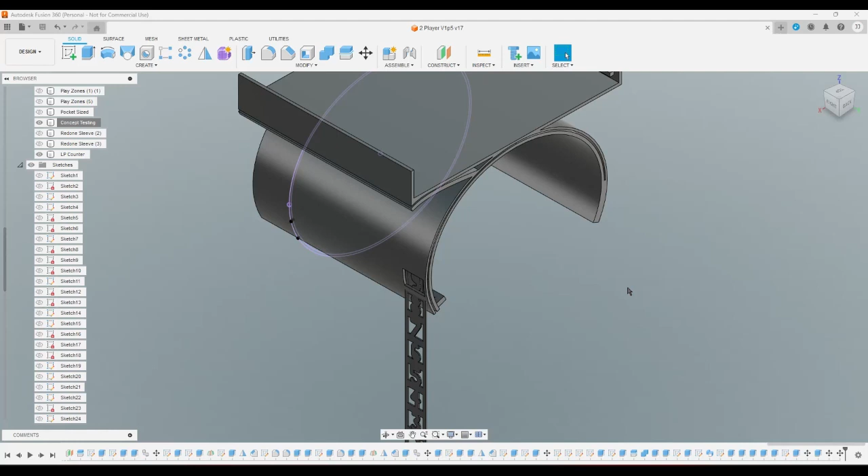Okay, so this was alright. Everything else needs a bit of work. So back into the original, the sketch for the sleeve. I'm gonna need to... what am I gonna need to do? I'm gonna need to redesign essentially the sleeve part of the sleeve, and I'm gonna also need to probably change this. Let me see how the other sleeve is. Okay, so it does go out just as far, but it has that thing in it.

So I'm gonna go back to the sketch here and basically redesign it. Should I redesign the whole thing from scratch? I should probably redesign the whole thing from scratch. Because if I'm gonna redesign it, right, I might as well. So here's the idea that I have. Okay. So take all this and just delete it. Right? I'm gonna finish the sketch real quick because a bunch of stuff is based off of it that I'm gonna just get rid of.

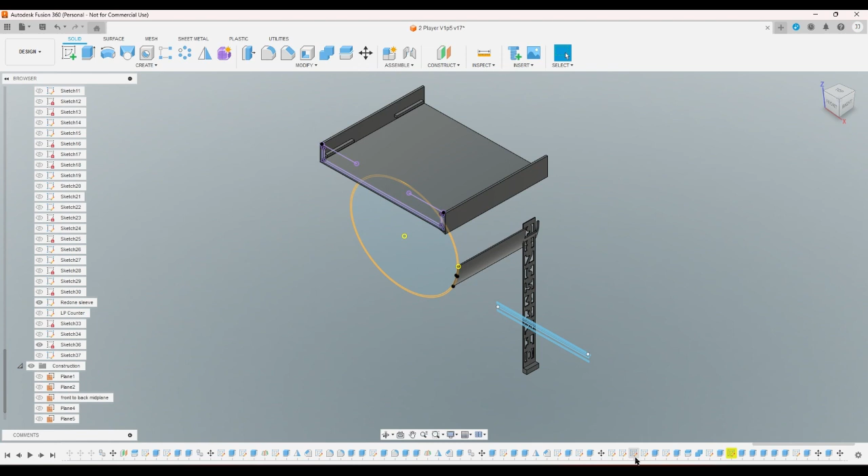Oh crap, hang on. Let me make sure that the... where is that sketch? Oh, it's way the heck over here, okay. And that got rid of all that stuff. Now I'm gonna go back into here. I'm gonna make my little ellipse here.

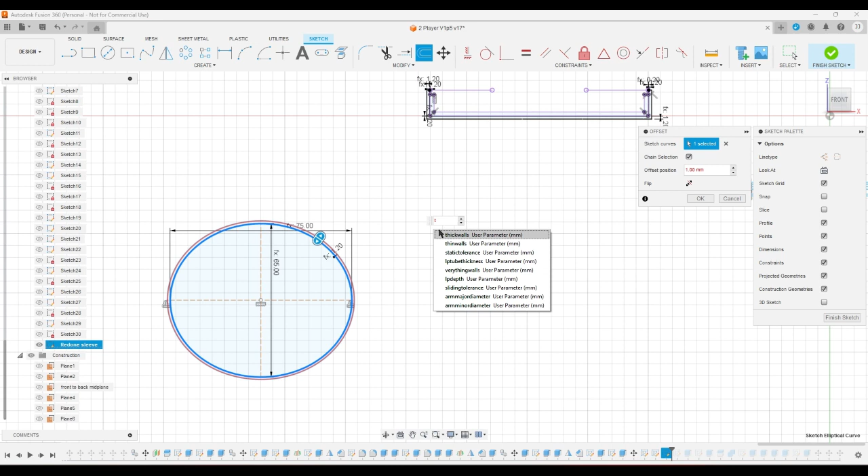No, no, no. That's what I meant to do. What the hell? No. Okay. And then offset this by thin walls. Okay. And I'm gonna kind of ignore that for a minute. Let's see. Since I'm redoing this, I might as well remember that I need to put the strap through it, right? So then, if I offset this by thin walls, plus I think it was 2, right? Two ought to do it.

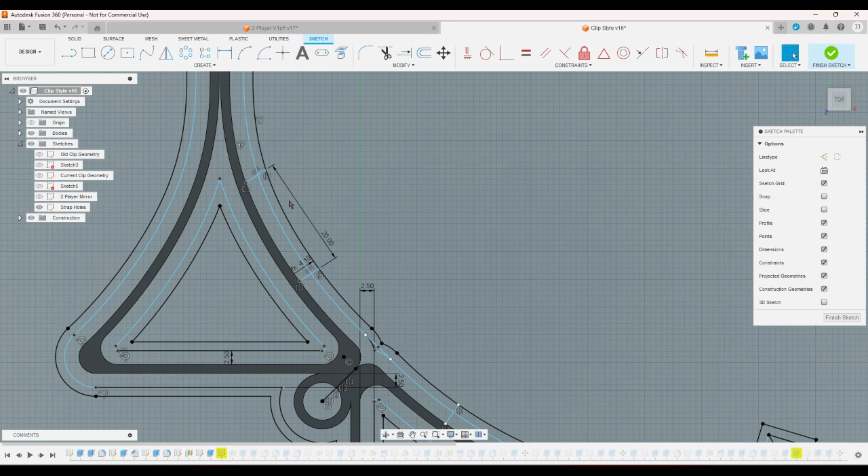Let me open my... measure that. Wall legs, wall fence, wall tube, wall geometry. Old wall geometry, extra deck, divider sketch, dividers, current wall geometry. I need to see. Okay. Ah, the strap holes. Okay. And the strap holes are in a weird place. That says 4.1. .6. Okay, so 2 will work. Don't save changes. Okay, 2 will work.

And then offset this by thin walls +2 plus very thin walls, except it's spelled very thing walls. Okay, so what that'll do is I've got the strap going through there, right? And actually, oh, I've got it, okay. Not yet, okay. The strap's gonna come out. I'm gonna plan out where my strap is gonna come out. The reason why I'm going to plan out where my strap is...

Oh, I have a cool idea. Because this is an ellipse, I can set these to be equal to each other. And so if I move this one, the other one's got to move too. Ha! That's cool. That's funny. Okay. If they come out about here, right? I can now trim this. That is annoying. That didn't work. Okay. So if I trim this from there, now it's okay, whatever.

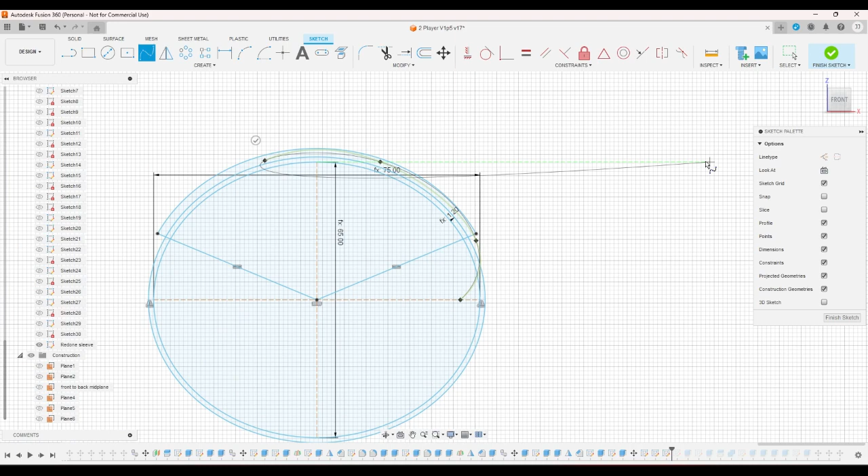But because the straps are coming out through there, right? Watch, if I drew a spline real quick to show it, right? It would basically go through a hole in here. Like that. Right? That's what it would do. Oops. I'm trying to visualize this. So because it's coming out through there, I need to put a line going essentially down like that. Okay.

And I need to put another line here and another line here, and make this one equal to this one, and put it about there-ish. Okay. Oh. This has to go all the way. Okay, yeah. Okay. So now I can offset, hopefully this one. Yep. By like 0.8. Right? I might as well just make that whatever.

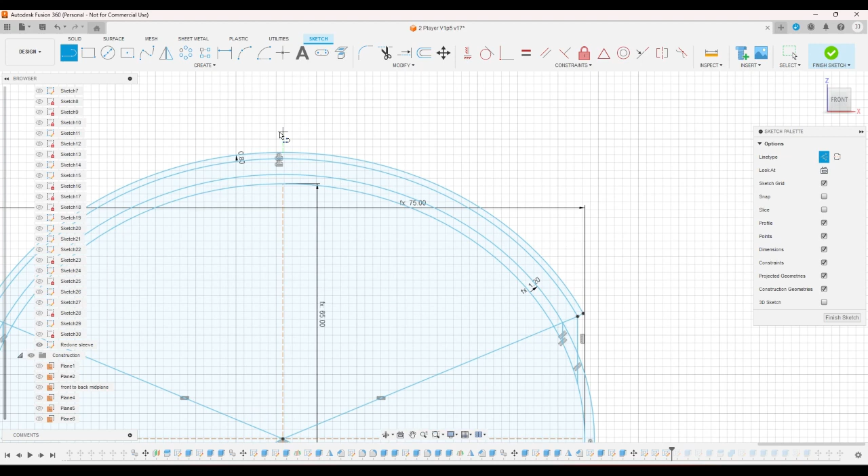And now this is where I have to put the... what's it called? The life point counter tubes. Right? And so these are gonna go, let me put construction lines here. These are gonna go this far. From there, then the first one's gonna go all the way this way. And then if that's that, then this one has to go about to here. Right? Yeah. And then I can probably go ahead and do this.

And then I can offset this by the... that one and that one are not... okay. The issue is this is getting quite thick. Ooh. The issue is this is getting quite thick, right?

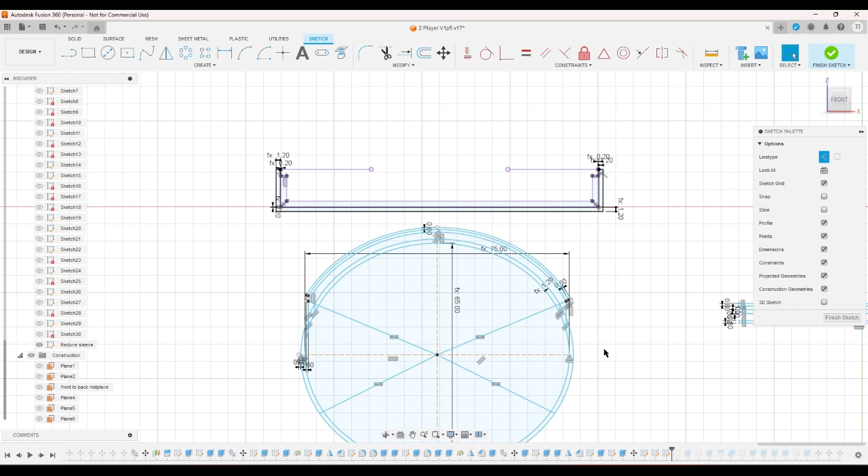So, but anyways, I could put this on this, right? And that's where it snapped. And then I gotta remember to, and then I'd offset this. Hang on. Okay. And then I'd offset this by the very thin walls. It'd be to there, and to there.

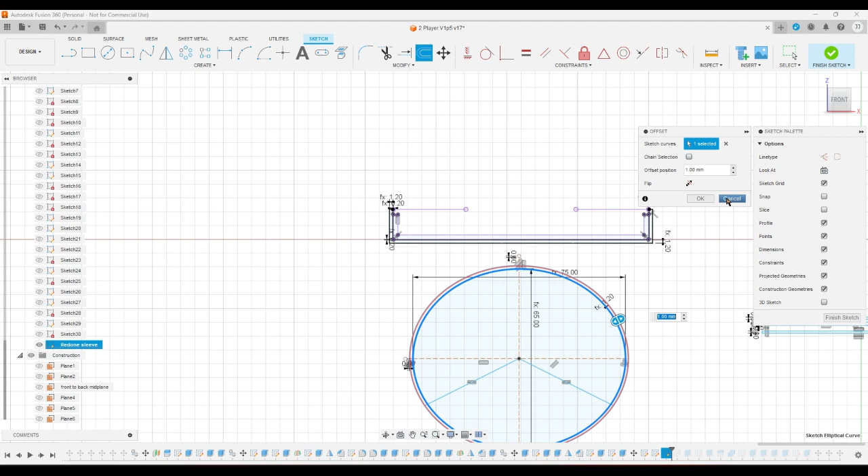I don't like where this is. So what I'm going to do is I'm going to go ahead and just delete everything outside of this. Okay. And I'm going to do the life point counters first. And I'm going to go ahead and put the strap holes through the inside of this. Okay, so, whoops. Go ahead and delete all of this stuff.

Alright. And then offset this by thin walls plus the life point tube thickness. And then put a line going out to the first one. Let's see, so that would be, yeah, and then this would be the very thin walls. Oops. Very thin walls. And then put offset.

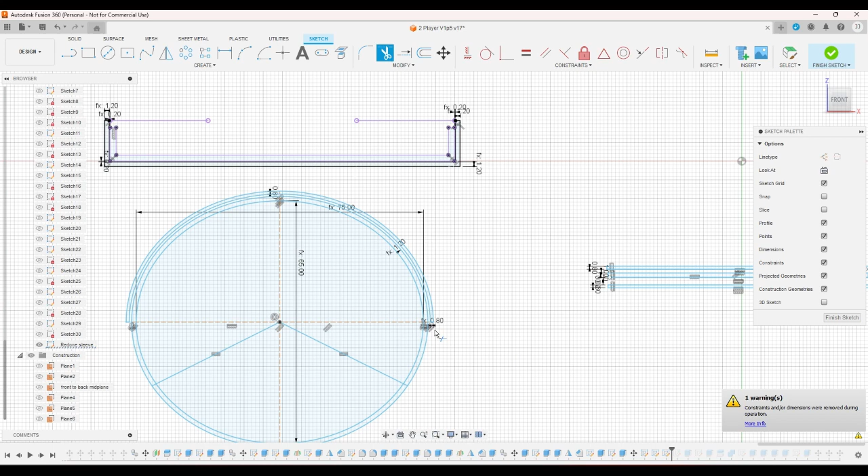I don't think they necessarily need to be, okay. Where do I want the life points to show up? I want them kind of visible. I want them more or less, I want them to come a little bit further down than this. So let me finish this real quick. I mean, not finish, but like click on finish. And then what size? 6.5. Okay. Okay. So, okay. This needs to be about 6.5, maybe 7.

And it needs to go here. And it needs to be here. It needs to be here. And this one needs to be also on it. Okay. This right here, that is as far as that needs to go. Can I put a tangent line on it? Can I put a tangent line at an angle on it? Yes, I can. Okay. Good.

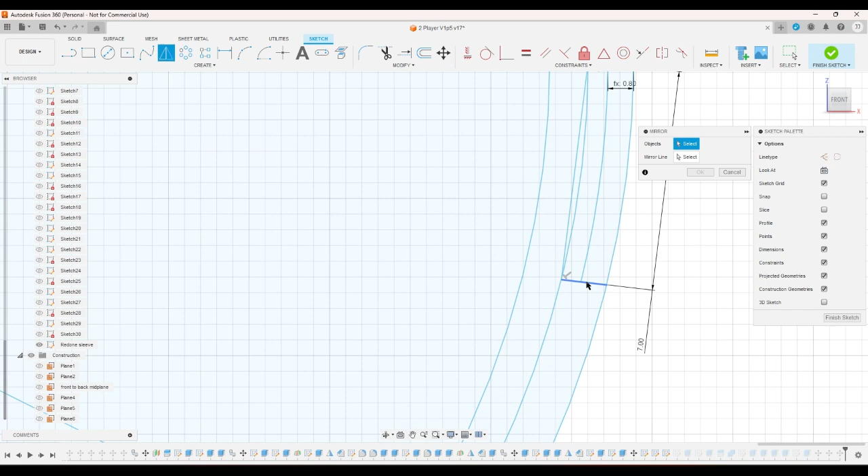Just as long as this is coming around both sides. It opens up here. Then one of them closes like here. And the other one has to curve around it. Oh wait, hang on. I'll just make this... It won't be perfect, but like I can make this perpendicular to this as close. Right? And then if I just mirror this across here, mirror this across here, then I can just extend that one and then trim this and this, right?

And this. But for some reason, I didn't mean to trim this one. Why did that get cut away? I guess I just accidentally cut it off. Okay. Oh, it's because I meant to cut this one and I accidentally clicked on the wrong one. Okay. So now I've got that. And that's not going to work because the two slips will collide with one another. So this one will go like, I don't know, here-ish. And then the other one will have to go above it. So, or maybe it'll go under it. No, it'll go above it.

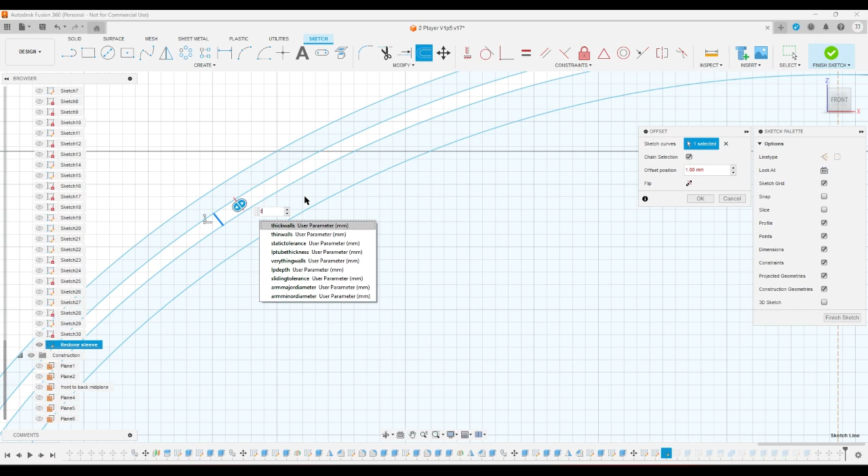If I go and offset this one by thin walls, can I... Ooh! So can I also... Okay, that puts those exactly where they need to be. So that's what I should have done here. Oh well. And then this. Alright. So now I'll go around here. I believe... Oh, no, okay. Okay, shapes of things didn't change. And if I move this around... Okay.

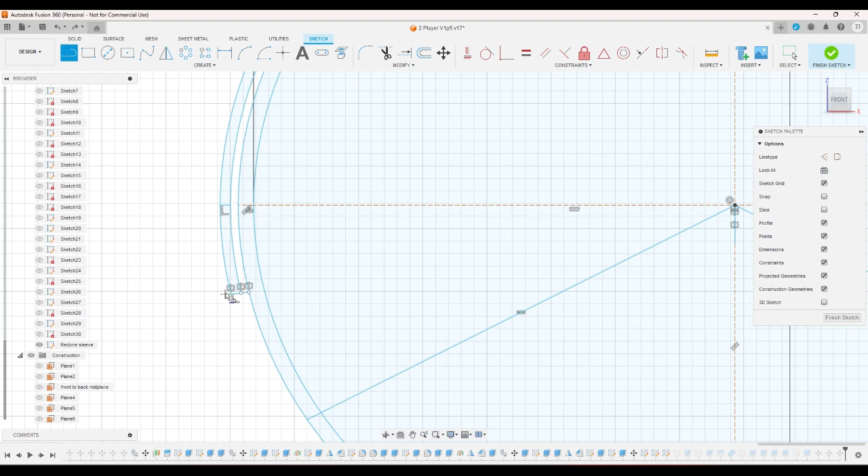Next is... Wait a minute. Is that... What in the world? This is not mirrored properly. Why is it not mirrored properly? Okay, I'm just gonna put that there. Then if I put that... Okay, that... Okay, good. So trim this one. And this one.

So if this one goes up, and we're to stop about here, how much space is in between? How much? Okay. How long is this in total, right? That's what I need to know. It's 95. Can I reduce that slightly?

Not really. Okay, I'm just stuck with 95 then. Okay. So since it's 95, I need to go to... Okay. If I take a squared plus b squared, square root of that. No, a squared plus b squared over 2, then the square root of that. And that gives me the whole circumference, and I need like a quarter of that, right? So then it's half of 65 and half of 75. So like 65 divided by 2 is 32 and a half. 75 divided by 2 is 37 and a half.

Okay, so square root that. Nope. Square that again. Divide that by 2. Now square root it. It's 26. That doesn't make sense. So if I do the 95, right? That can easily wrap onto that. So I really only need it to go like, because if it starts here, right, it can wrap around to thereabouts, right?

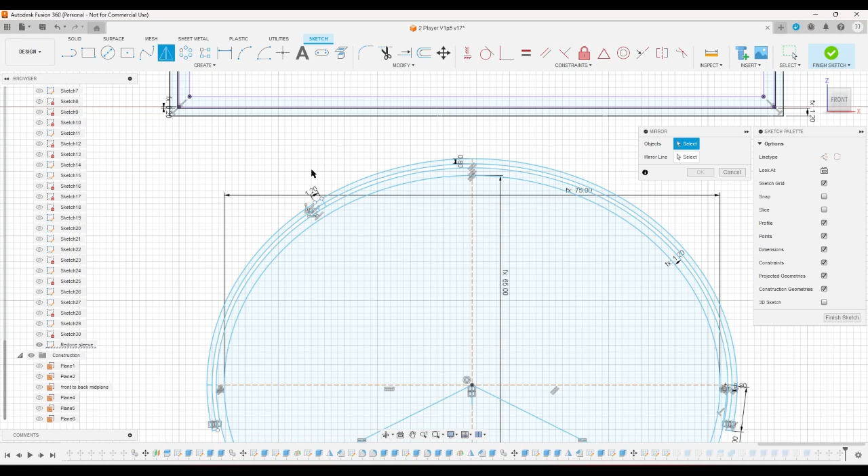Oops, wrong number. 1.2. I'll just call it there, and then okay. Now this one has to wrap around to approximately the same place. So if I mirror this across this line, and I just extend them, right?

And then this one kind of has to go from here to about something. There, okay. About there, okay. And then from here, that's got to be the life point tube thickness. All right.

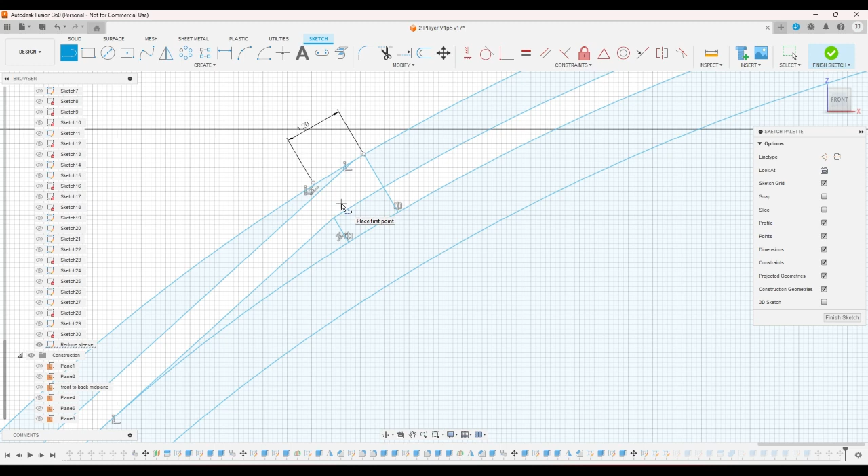And extend this all the way. Now if I trim it, if I extend this, and I trim this, that was not on purpose. If I extend this back to there, I can trim here. Alright.

And then, what is this? This is going to be very small, isn't it? .235. Okay. So I'm going to make that just 0.8. No. I've got it. Okay. All I got to do is take this point, go back to where I was defining. Okay. Let me define this by an angle. Ooh, okay. I know what I need to do.

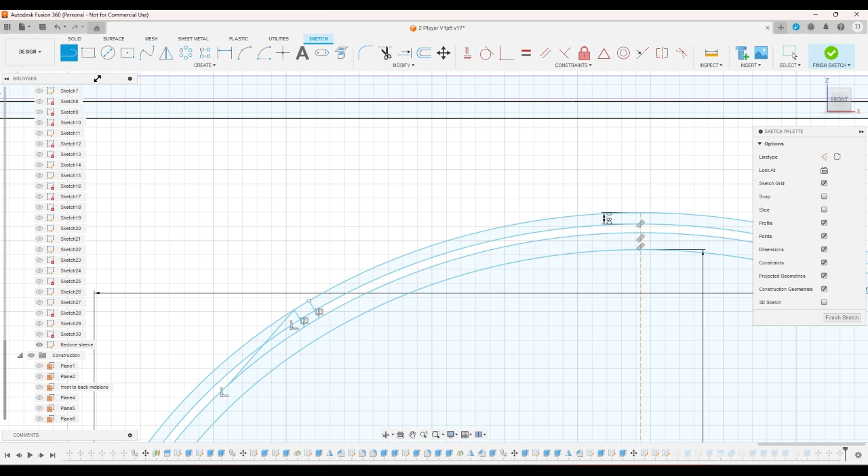So now if I go from here and that'll be my 1.2 thickness. And I extend this as far as it needs to go. Right? So now I can trim what needs to be trimmed away. Okay, so now this one has a path to wrap over to the other one. There we go. That's what I needed.

So now I need this to be that, and then I need this to also be that, and then I need to make an ellipse that goes from here to here to here, and I should be able to trim off what I don't need. Yeah, okay. Okay. So now this can go up to there. And if I imagine these, I can trim this.

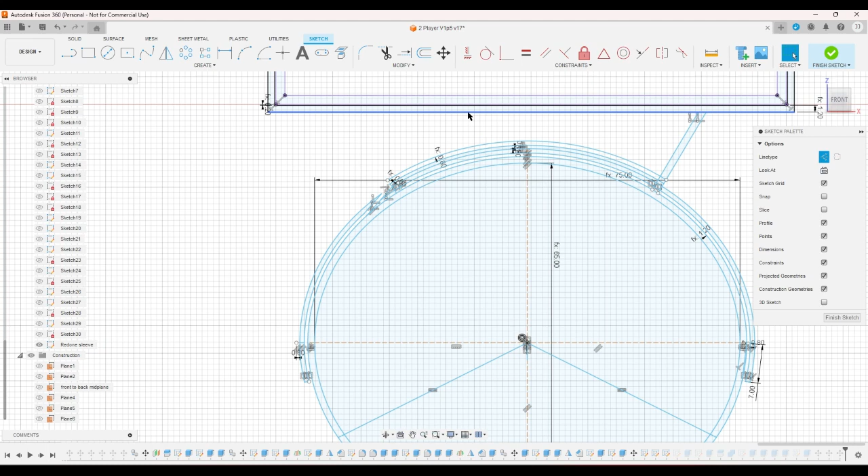And then I can offset. I can select just this and offset it by very thin walls. And then I can connect this to this one with an arc. Where is it going to snap? Where is it going to snap? And if I try to move it, yeah, that's moving all the stuff that I don't want it to move. Okay.

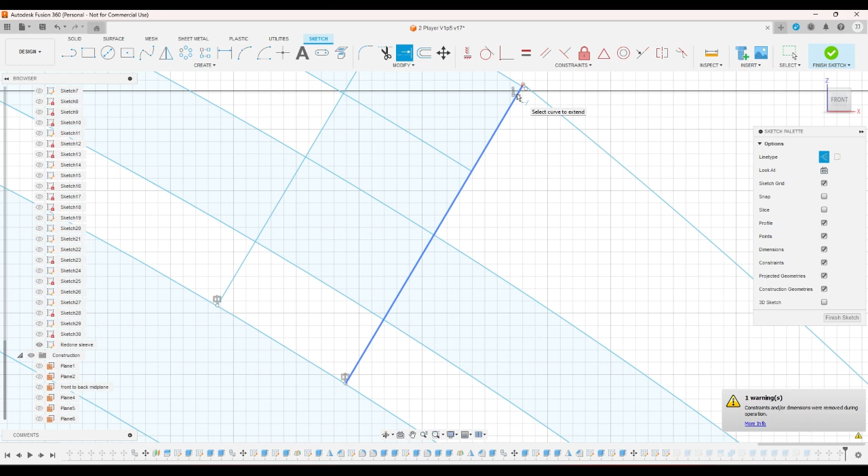So this is, okay, no, yeah. So this goes up to there, and this... What? That's a line. Why is that a line? Okay. It's just as long as it looks good. Okay. So now if I trim this, and then I can mirror this, right? And for some reason, this one doesn't. There. Okay.

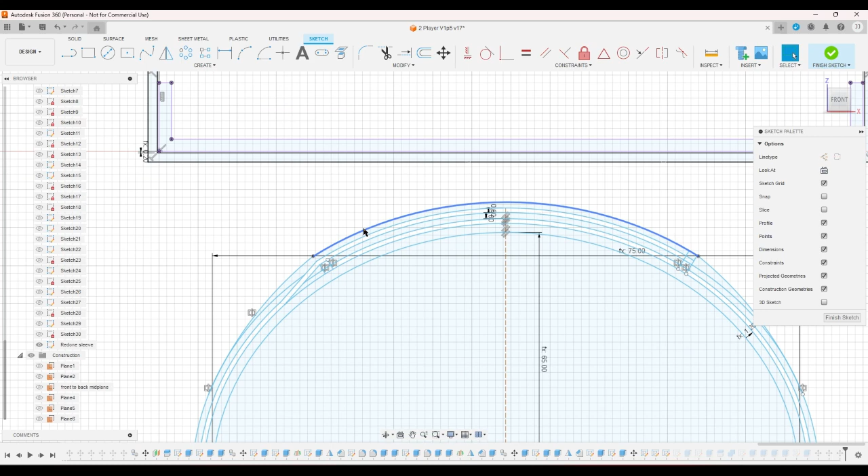That's some confusing geometry to figure out, because I wanted it to look all right. I wanted it to at least look, if you're not looking closely, more or less symmetric. But it's not symmetrical, because one of these goes over the other one, which is not a symmetrical thing to happen, right? There's some hidden asymmetry going on. So that is, and I also am going to have to test this to make sure it actually works.

But there's that. Now, if I offset this by -2, and then I offset it again by minus (2 plus thin walls), and then I just kind of see if I do that right. Where's my? Hang on just a second. Okay, so where do I want to put the holes for the straps?

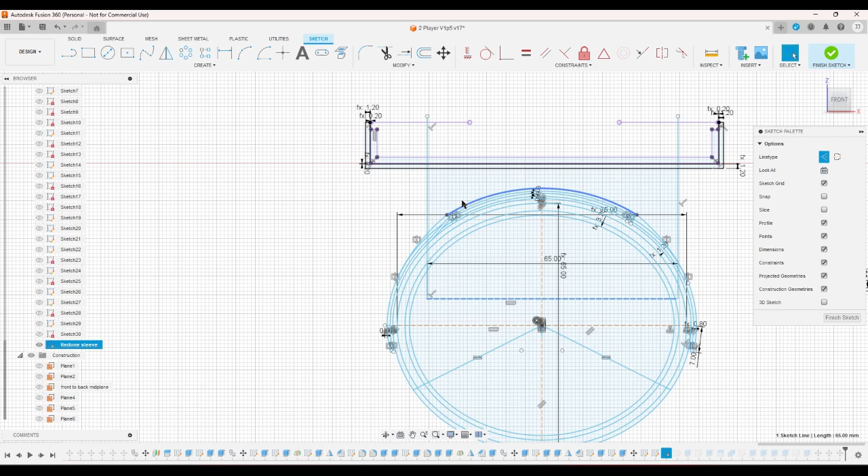and then actually I don't need these to be where they're at. I just need to make sure that it's touching here and that it's touching, oh god, okay. And then it's touching here. Okay, cool, that moved just that. And then if I bring this down, on both ends, it's very hard to see where things are right now.

But at least it's very hard to see from all that. This is very, very confusing. But when I do the extrusion, it's going to come out properly. About here, 2, and 2. And going all the way up.

Now if I trim it, that's supposed to be whatever. That 2.0000093 is probably because it's a floating point number. It wasn't because the program decided that because I took away that constraint, it needs to change the geometry. It was probably just a weird floating point math thing. All right.

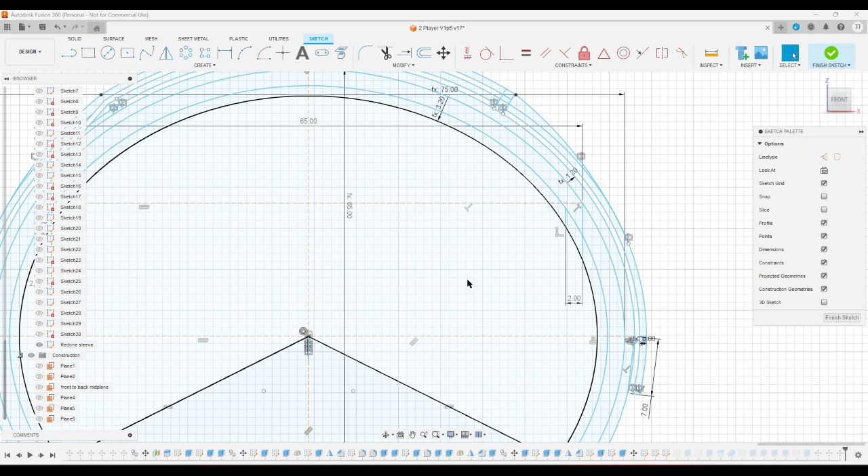So now I have everything I need to be able to grab this. No, I gotta put a point here. The reason I need to put a point here is because this point is what I'm going to be moving this according to. Okay. So I can grab all of this and get it up here on the center line. Okay. Now, this extrusion here, where the heck is it? I don't know, but it doesn't matter. Okay.

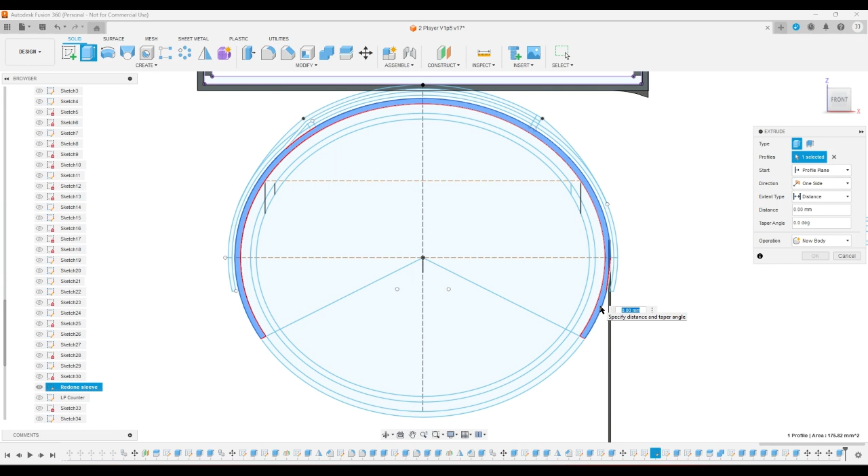First, I need to cut this out. Okay. Then I need to, okay. This is my arm. This is the first tube, honestly, it's more of a sleeve for the life point counter, and then this is the rest of it for the other side. I don't think these are equal. I have to remove the life point counter. Okay, and then this. Aha. Okay. Yeah.

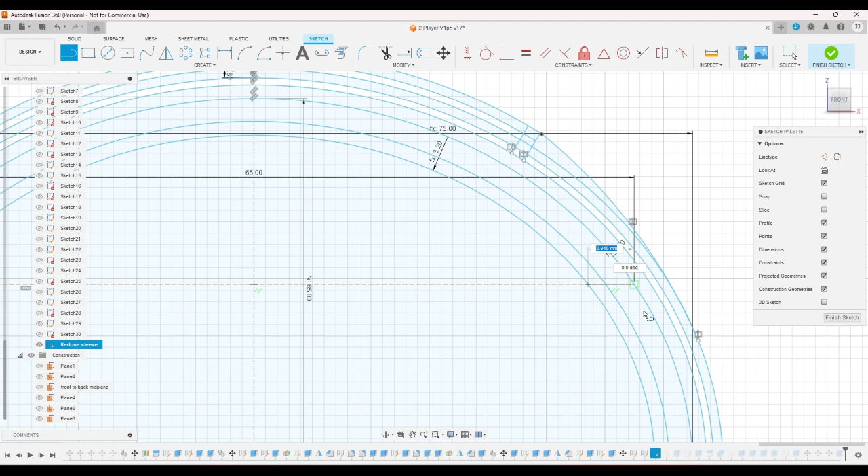Okay. Gotta go back into the sketch because I did the strap hole slightly incorrectly. Okay. The strap hole is, this is the arm, this is the strap. Yeah, I'm just gonna go ahead and do this. Okay. Now I can get this. This part's my arm, this part's for the strap, and this part is for the life point counter on one side.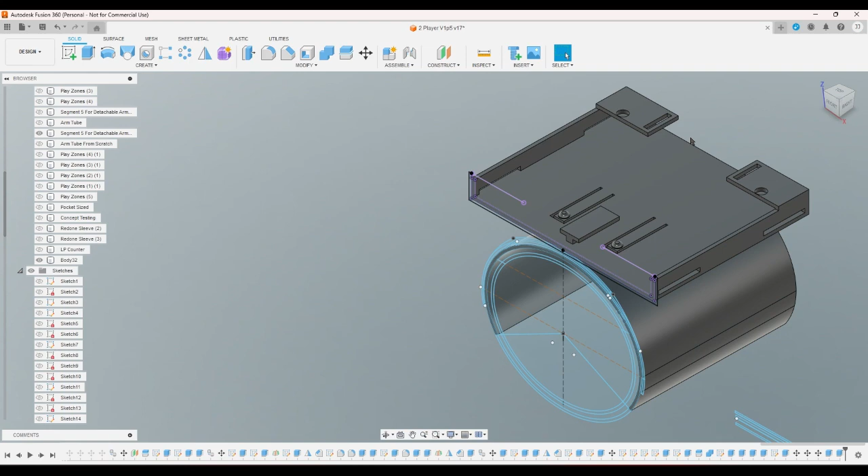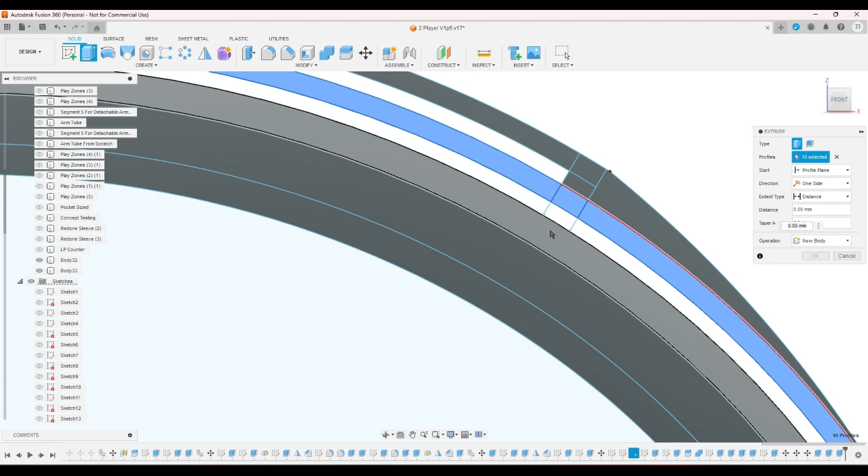Now, if I get the rest of it, right? Okay, there it is. So now, as it is, oh, hang on. And this. Okay. So now, what? Oh my god. Wait, what? That's why. This isn't connected, that's why. So when you click on new body, yep, there we go. Okay, there we go. Now.

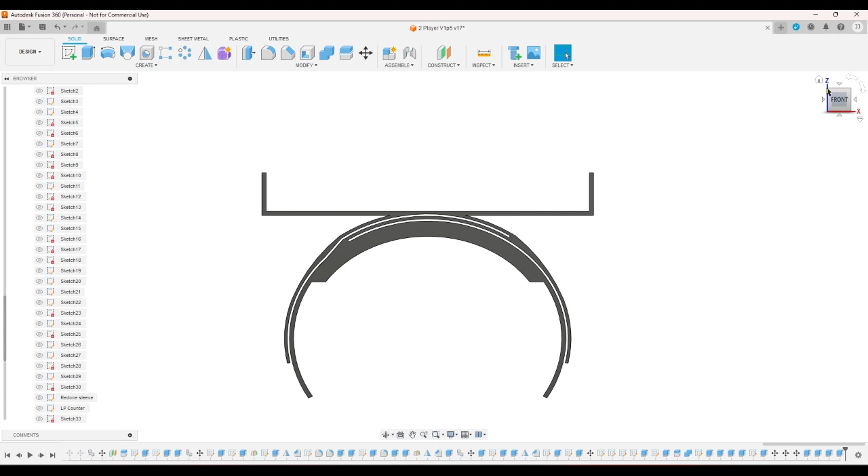Okay. So now, what do I have? I have this part attaches to my arm. That's the strap hole. That's for one of the life point counters. That's for the other life point counter on the other side. Okay. Good. Now let me bring up the life point counter. It was 10, right? How big is this? 9. Got it.

So 9 times 5 is 45. If in between each one of those, I added a small little divider of like 1 millimeter, I would add 4 to 45, which is 49. So then the total, let's see. Because here's what I'm going to do. Right now, as this is, it's going to want to unfold like an accordion. Right?

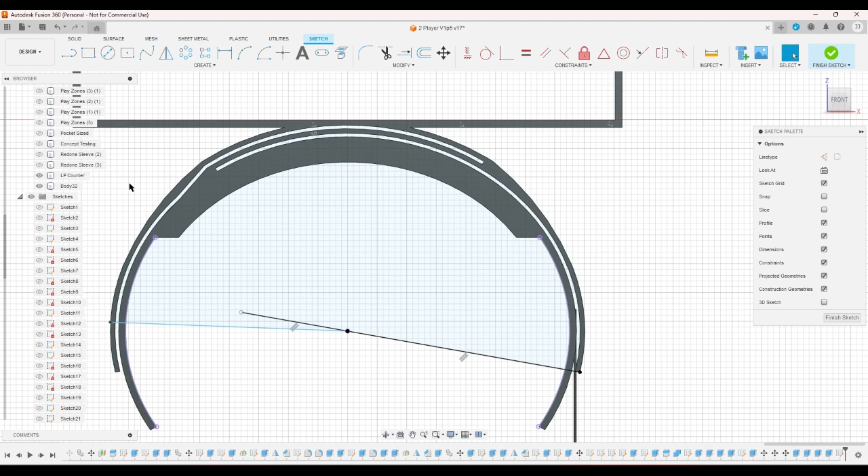So what I need to do is, first of all, take this, draw a line through there and a line here, that is on this. Make them equal, but don't make them collinear. And then put an arc between them, but don't define the arc. Okay. Now, if I make this equal, it failed to solve because it wants to constrain this.

But if I do this, okay. So what I was seeing was just an optical illusion. I needed to know that because it looked like this came out farther than this one. Anyways, get rid of the life point counter. I need to make a line going from here to here, and a line going from here to here. So now I can close this, make it something like negative 10 for now. There. So if I did this properly, this might actually be the same on both sides, which would be pretty freaking cool.

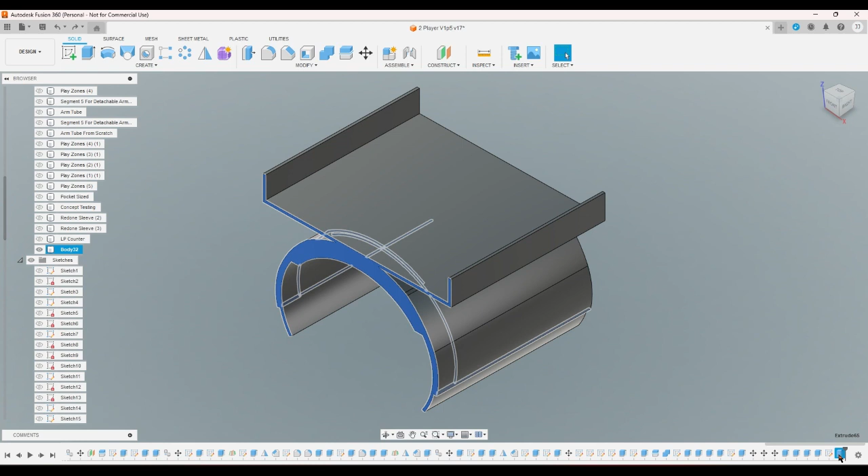Gonna make that a parameter. I'm going to call it LP closed depth, 13.55, okay. Negative LP closed depth.

Okay, so now if I bring out this sketch again, and I go ahead and do that again - that is so silly, that is such a silly shape. Then I bring back the body and I go from here to LP closed depth.

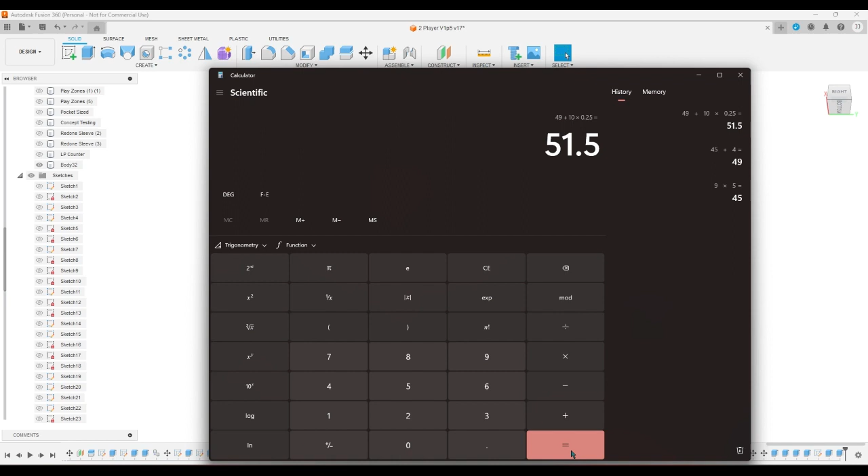I just realized I've got 9 times 5 plus the 4, plus, right, 10 times a quarter. The reason why it's 10 is because the 10 times a quarter is going to give me my sliding tolerance - I forgot to add in the sliding tolerance. Another way I could have done this is 9 plus a quarter on either side is 9.5, times 5, then plus that 4 is 51.5.

51.5, right? And then it was 76.1 minus 51.5, and divide that by 2, and it's actually 12.3. So change that parameter - this is why parameters are good. This should be 12.3. So if I hit Control Z, right, that widened a bit. That's good, that's good.

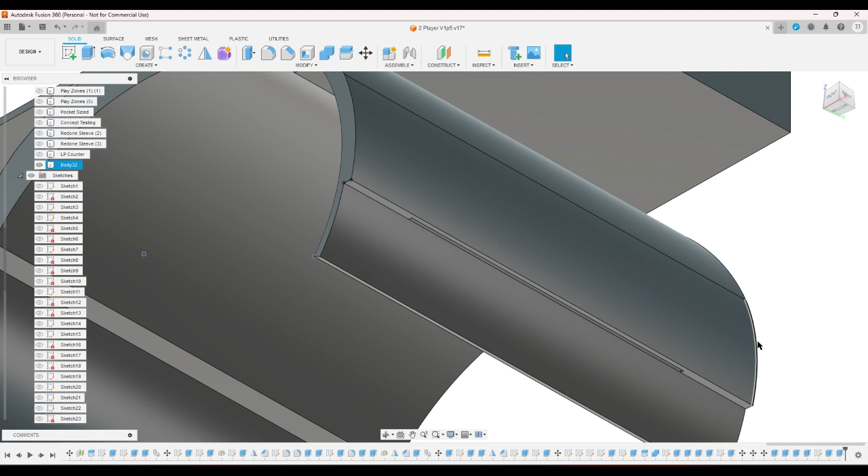Also, how tall is this? .4, okay, that's cool. Because on the life point counters, this tab is so that you can grab it, right? And as long as it's bigger than this, it's fine.

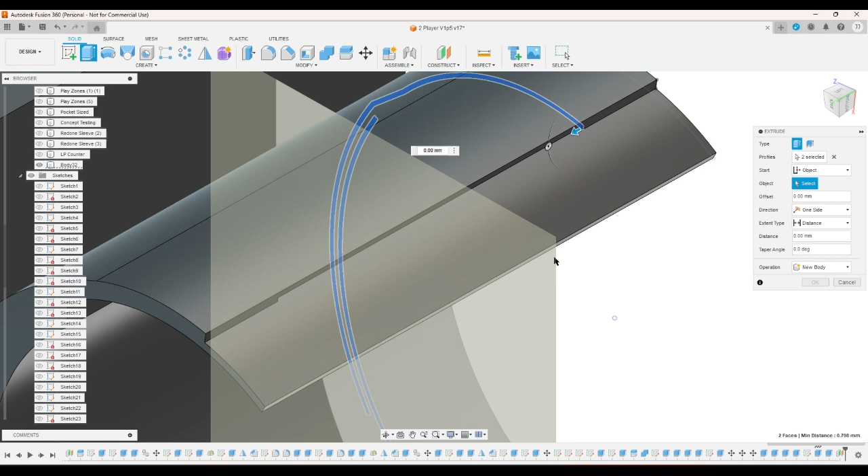So now I need to put planes on here. So it was 9.5, and then if I just extrude this, how much of this did I get? I should need both of them, yeah. And this, start on an object, this, distance of 1. Alright.

What's the front to back mid plane? What was this plane? Oh, okay, yeah, I'm gonna rename this plane to LP divider 1. Alright, there should be about 4 of these in total.

Offset plane from here, it's 9.5. Then I extrude this on both ends. Start an object.

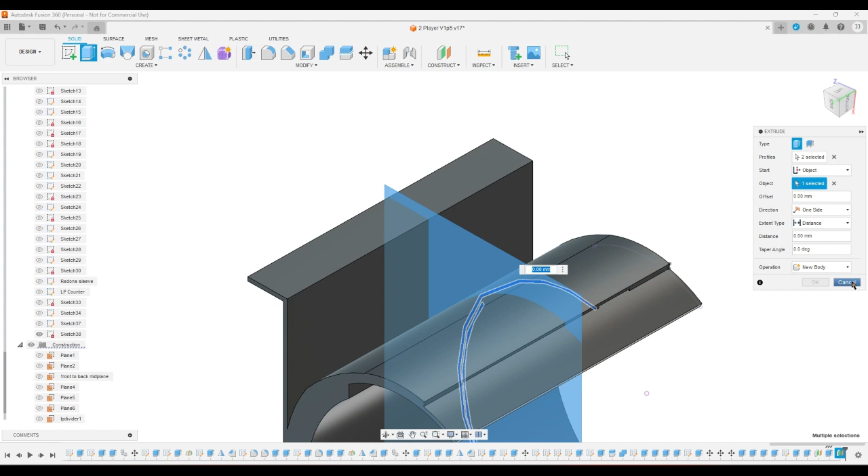I'm doing this a stupid way, but I'm gonna keep doing it that way because I don't feel like doing it the smart way. The smart way, by the way, is I could have extruded this and just in the extrusion started at an offset of 9.5, and then extruded this at an offset starting at an offset of 9.5. I didn't need to put the planes in at all.

I'm gonna make a parameter. I'm gonna do it the smart way, actually. LP divider offset, it's gonna be 9.5. And then I'm gonna go ahead and delete this, yes, and delete this, and delete this. Okay, and start doing it the smart way. So start offset, LP divider offset, distance 1. And then do the same thing again and again and again for like 4 times.

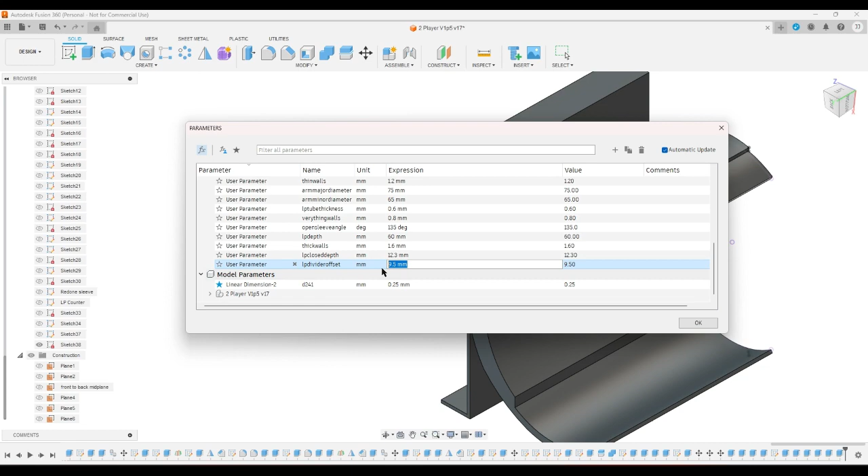But here's the clever part - this is why I did it the smart way. If I change the parameter, no, not the material, the parameter, to something smaller, like say 7, see, now they're spaced closer together. But I want them to be 9.5, so they're 9.5. That way, right, if I discover I got this wrong, right?

Actually, if I discover I got this wrong, I'm probably just going to change the life point counters themselves, because they would be easier to change and take less filament. But yeah, anyways, that way if I discover I get something wrong, I can correct this, right? And then I can correct that spacing. So that was the point of that.

Okay, so now let's see, what do I still need to do? I need to add in the strap, and I need to add in the thingy here.

So I'm going to put a sketch here, and I'm going to add in a line here. Okay, I'm going to project this then. Now I'm going to add a line that's like, what was it, 3? I think it needed to be 3. Yeah.

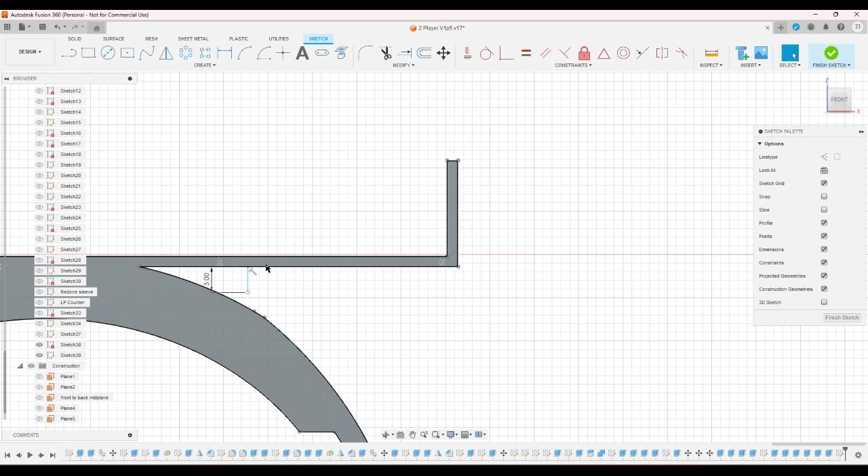Okay, now I'm going to add a spline. No, I'm going to add another line. It's going to be 0.4. Put another line, and it's going to pass through that point. That, and that, and that are all construction lines. And then now I'm going to put the spline.

And then I'm going to put another construction line here, and that's going to be vertical. Oh, that's right. And then the way I had it on the play zones was that this was equal to this.

So now I just move this back and forth until it looks good. And then I offset it. First I put a line. Yeah, first I gotta make a line that's not a construction line. Now I can offset it by the thick walls.

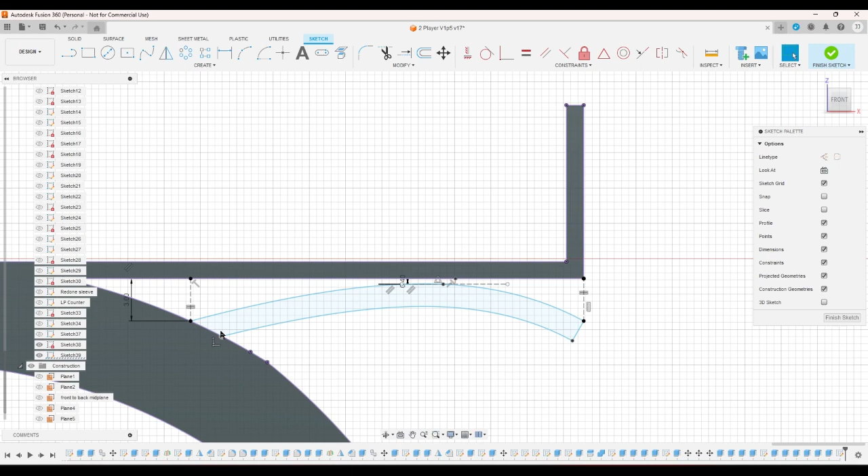And I think something that might be happening here is this angle here might be interfering with this ability to bend, I think.

So what I think might help with that is that actually if I... because how big is it? This is pretty small actually, because it's... that's only 24, right? And then half of this, whoops.

Dimension from here to, can I measure from this to the, oh no, I can't, okay. Half of this, right, is like 46.

So I wonder what would happen if actually this was thinner. So I like for things to be a multiple of 0.4 when I can. What if instead it was 1.4, which is not a multiple of 0.4, but it's in between 1.2 and 1.6.

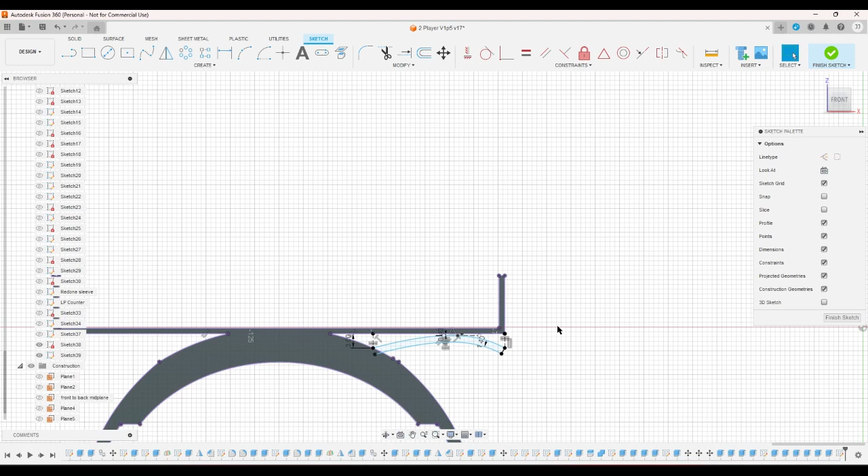So I'll try that, right? And I guess I might as well mirror this. Alright.

Now, an issue is this is too thick. Or too... this is too long for this to be. But I don't... but if I make it smaller, right, then the whole thing, and to make it print nicely, I'd have to put both sides of this of this on just one end, right?

And I don't like that, because then I could have mine on my right side, and then player 2 has theirs on their left side, and that kind of breaks symmetry, right? I mean, the symmetry is already broken with the dealer, because when the dealer's on my left, the dealer is to my left of the blade sleeve, and it's to player 2's right of the blade sleeve. But I'd like to keep symmetry when I can, you know.

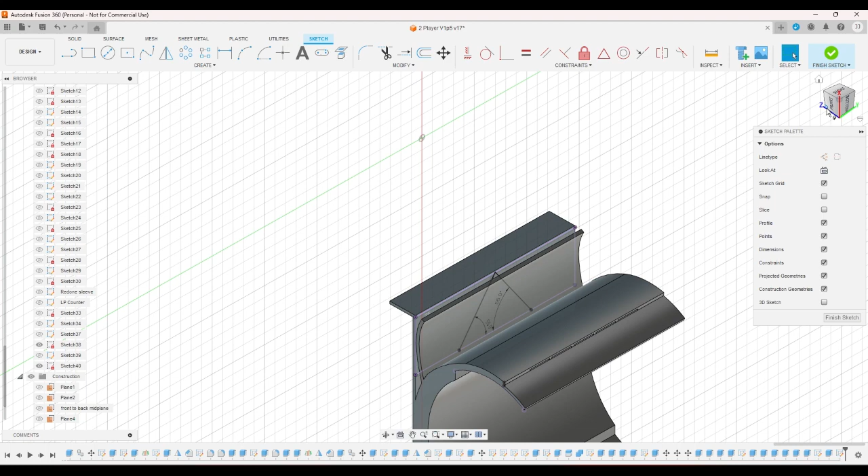I can actually achieve 55. I can achieve approximately 55.

Then if I cut away this, can I? Ah, crap. Okay. Well, that's fine.

Plane through two edges. Edge number 1 will be here, and edge number 2 will be here. Okay, so now I should be able to... cool. Just gotta get that sketch cleaned up.

Okay. All right. And then, is there a midplane for this? Yes, there is. Okay.

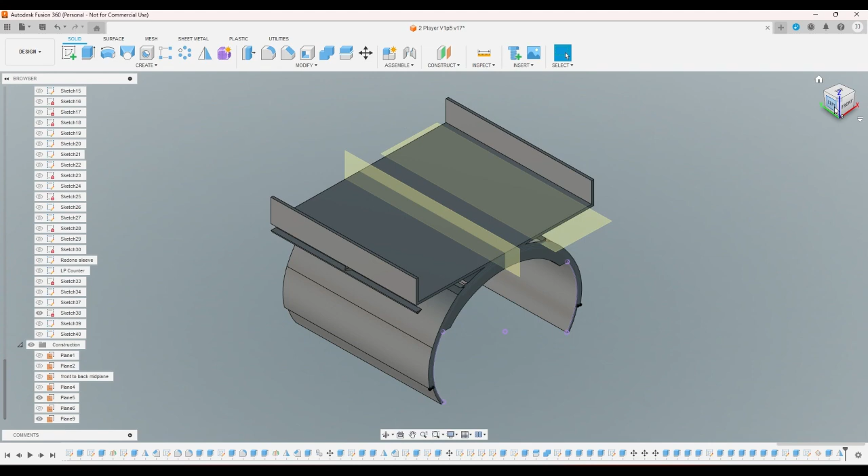I don't know, but you know what? I think I've got a better idea.

So okay, this is the smarter thing to do. Okay, then I project this, and then...

Okay, if I put these two arcs, an arc on this side and an arc on this side, and then I extend them. Okay, then I can extrude this to here.

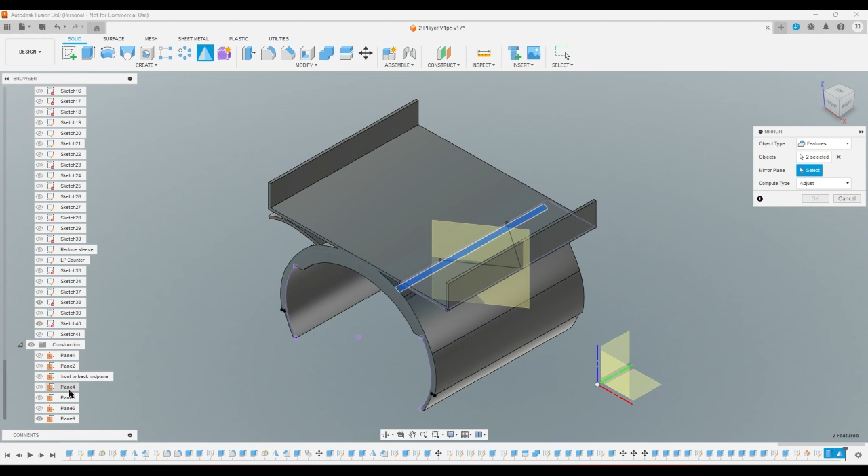That's much prettier. Okay, and then I can mirror this feature on the front to back midplane. And then I can mirror these two features on this one.

Compute failed. No pattern instances could be intersected with the original body. Try adjusting the... whatever, okay, whatever. I'll just do it again. Oh wait, hang on, what if I mirror... no, I'll just do it again. So,

Start a sketch here. And project this. And then go from this line to here, and from here to here, 55.

Then put another plane on it. Okay.

This is on both, just real quick. Oh good, the dividers are on both sides.

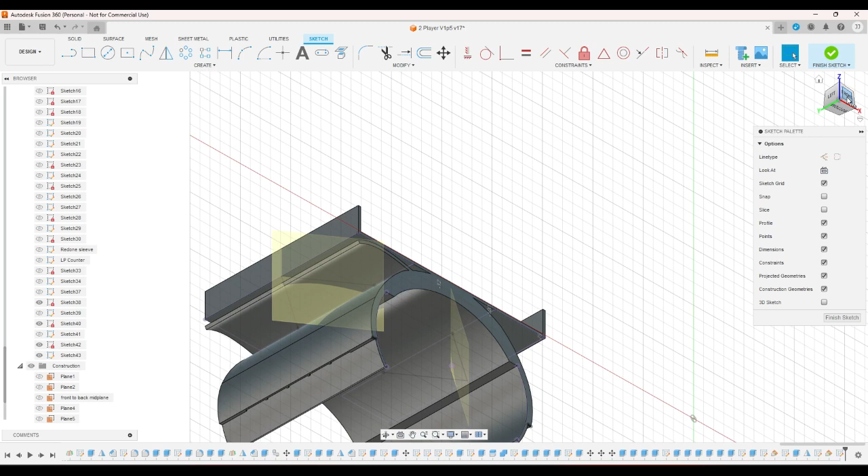Okay, anyways, I've got to project this.

I've got to put arcs here, here, here, here, here, here. Extend them both. Extrude this to this, and then mirror this feature on the front to back mid plane.

What is this? Okay, what? That is not what was supposed to happen. What? Did the other one do the same thing? What?

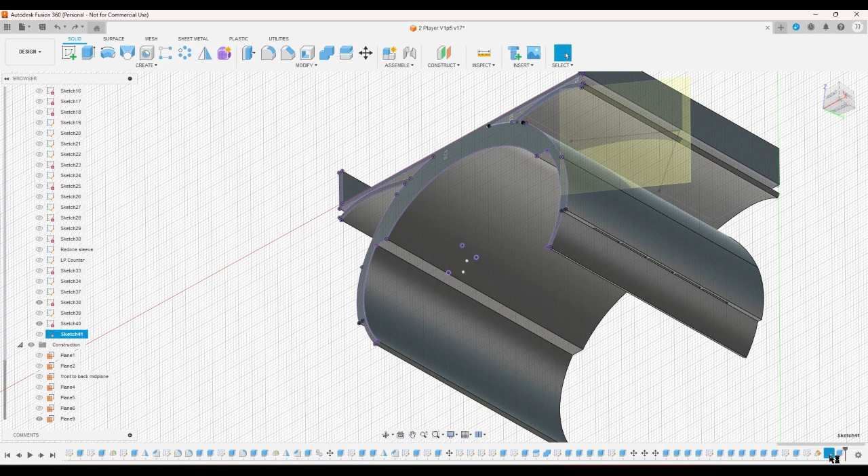Okay, well, here's what I'll do. Nope, wrong sketch. But you know what, I will do this real quick.

This sketch, no, this sketch. No, oh wait, oh, I projected a different one. Oh, I see. Okay, I projected the bottom here. Okay, then I went line midpoint here, here, and then this was 55, and this was 558.

Okay, now I gotta put a plane at an angle for all of these lines.

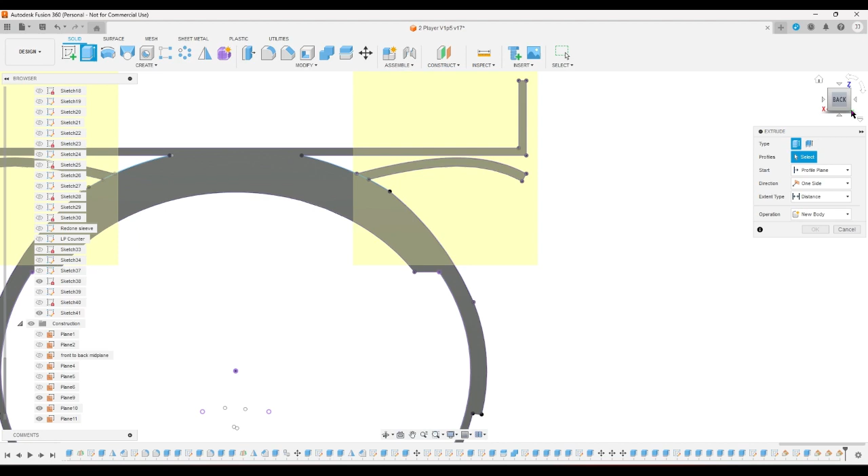Okay, now I gotta take this one and cut this. Here it is. Okay, cut this to here. What? No target body found. My goodness.

Oh, okay. Then this start here to here. Okay.

Extrude this to here. Extrude it again from the other side, to here.

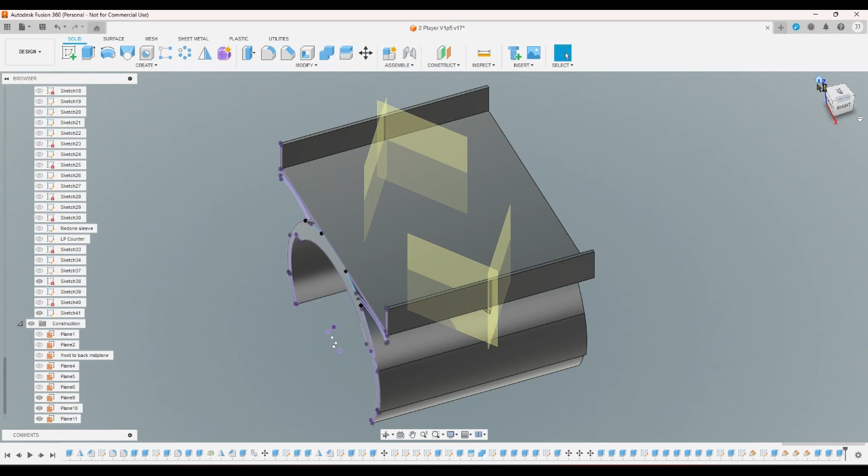Alright, and then I can go ahead and clear off these planes real quick so I can see clearly, and clear off these sketches too. So now I've got a really strange looking piece here, but if I was to print this, it ought to work.

So now the next thing I gotta do is the strap hole, which should be pretty simple, because all I gotta do is fillet these 4 edges here. Just kind of... that'll work.

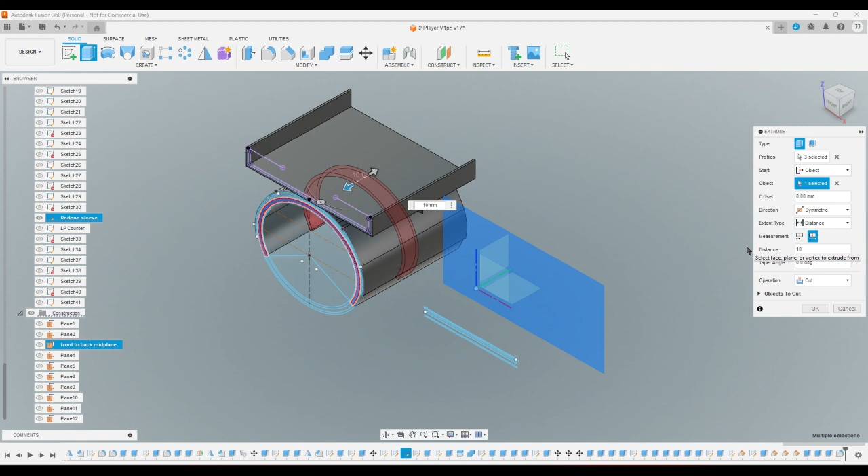Then bring back this one, and just extrude away all of that. Symmetric, total 10 for now. And that's the strap hole.

Let me measure the... no, let me open up this one to see how much it was. And it was 26. Okay.

Okay, so now I have to add in the little tabs here. So how am I gonna do that?

That's not good. That's very not good, very not good. That's pretty bad. Put that back together.

Okay, so the way I am going to do that is obviously I'm going to bring back... Oh, you know what, let me rename these sketches. This... okay. Blade attachment tabs. Okay, good thing I found that sketch.

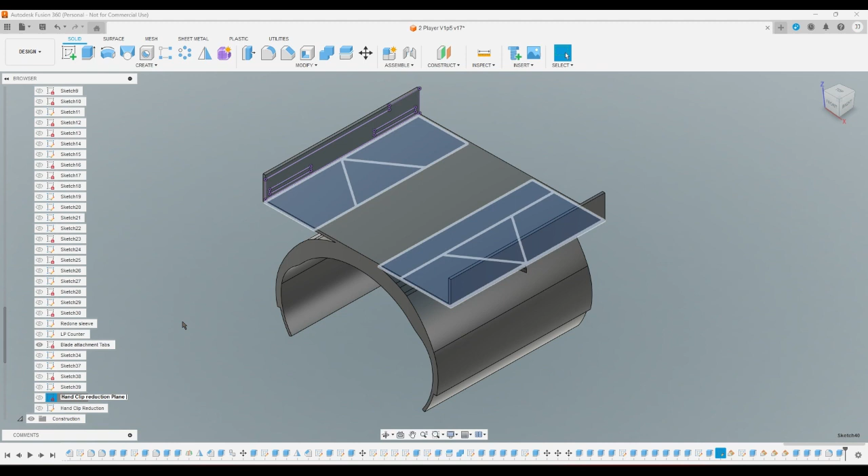Okay, now before that was this one. Wait, well, what was this? That was something, I don't know. Okay, this ought to have been the LP counter dividers. And then this one and this one are two things that I kind of just ignored, and this one I probably just ignored too.

So now if I extrude... hang on. So if I bring back sketch 5, and then I extrude this, and I go to object, and then I switch back to distance, that's 1.8. Let's call it 1.2. Let's see.

Yeah, because that's most of the way in there. And then... okay. So now, I'll go ahead and find that... was it plane 6? It was plane 5, yeah.

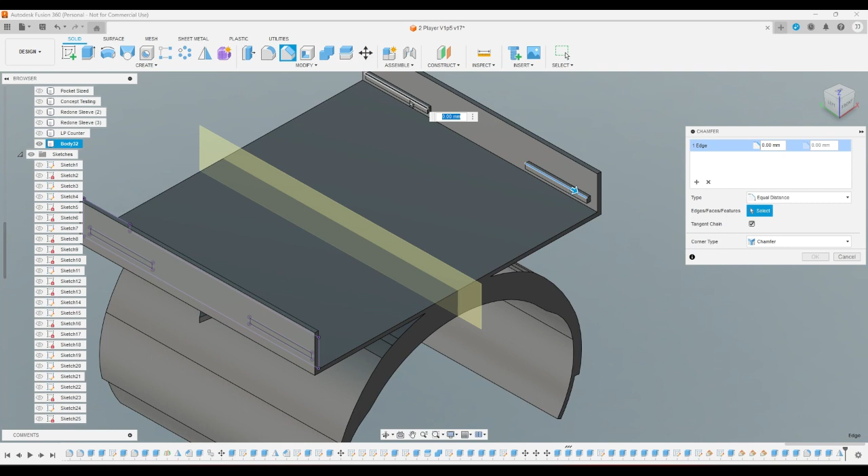And then what I gotta do is I gotta chamfer these. It's gotta be 2 distance. Okay, fine.

Put a sketch here, project. This one, this one. Oh, actually these 2 lines. And then...

Alright, mirror. Can I pick the plane as a line? Yes, I can. Okay, cool.

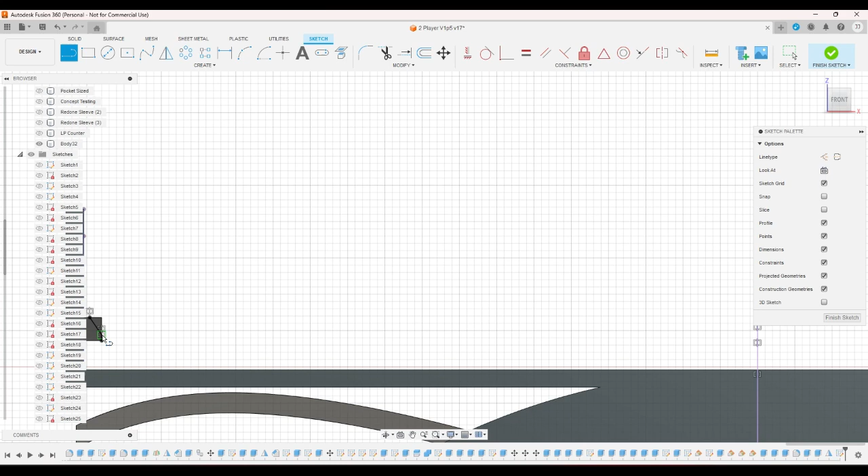Okay, put that there. Then... I mean, there's no reason this needs to be vertical, but I might as well. Alright.

And then put a sketch here, and then project this line, this line, this line, and this line. Oh, and project the other lines.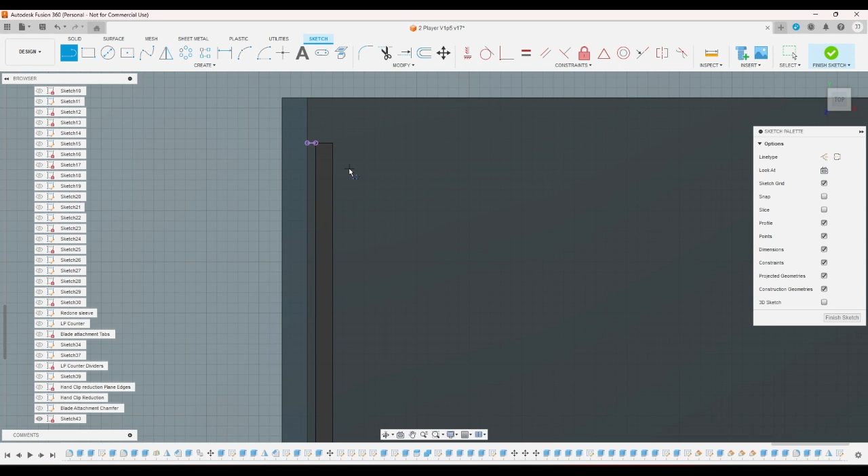Okay, so now these are equal. That's going to be vertical. It wanted it to be horizontal for some reason.

That's so stupid. Was that 35 point? Oh my god. Oh my god. There, okay. What the hell? Okay, okay, okay. Trim it, trim it. Okay. Now, these need to be equal. Oh my god, there's a stupid frickin'... There. That's why. There was a goddamn perpendicular. Can't believe that.

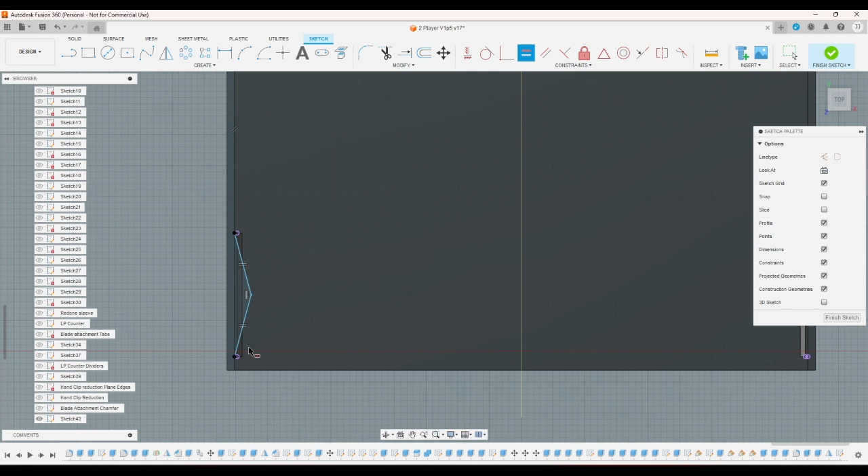Sometimes this program, it has its days where it's like, I'm just gonna do everything wrong that I can. Absolutely terrible. Terrible, terrible, terrible.

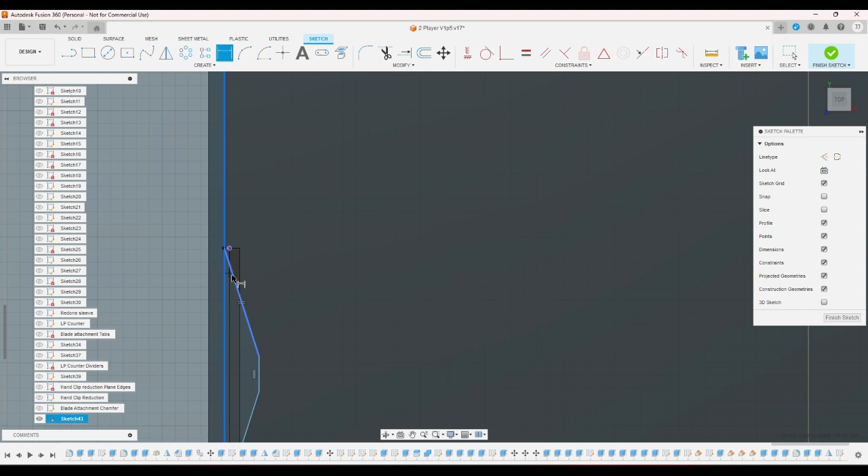Right, line equal. Now I can make this, now I have to project this. Okay. What do you mean fail to solve? Okay, where's the parallel? Is there a parallel? What the hell? There, jeez. Stupid program is like, oh, I can't do this because. Just because. Failed to solve. More info. Failed to solve, please delete or modify one of the following constraints and dimensions.

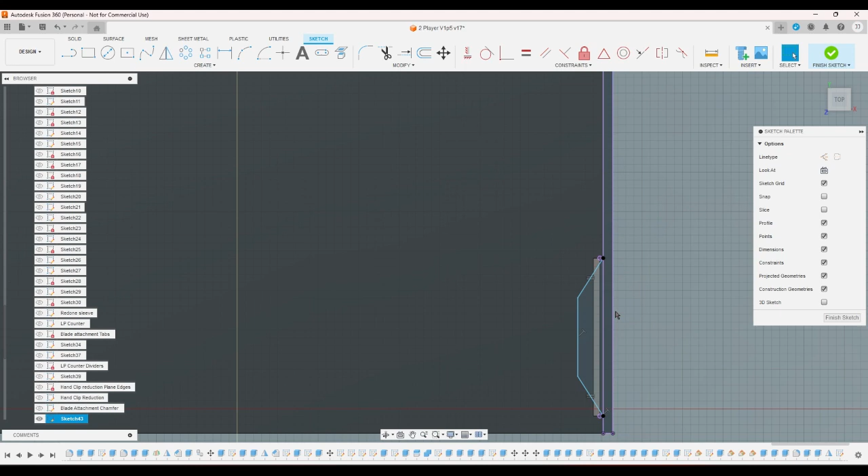You think you're smarter than me, but you're not. Gotcha. I have spatial reasoning skills, and they're better than a computer program. Stupid.

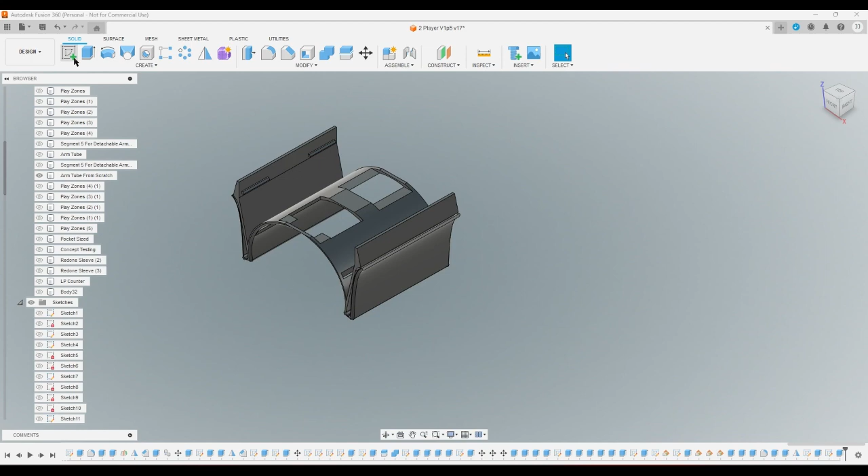Okay, now put a line going from here all the way to here, and another one going all the way from here to here, and that one. Okay, now, okay, there. That's what I needed. This is weird looking, especially compared to this one, but it ought to work, except I almost forgot, because I keep almost forgetting things. Segment 5 for detachable arm. No, let's see. Arm tube from scratch. Okay. I almost forgot.

No, hang on. Okay. Segment 5. I need to measure this. From here to here is 33.2. And from here to here is 25. Oh, it's only 25. That explains a lot. Let me write that down on a piece of paper. Yeah. And then from here to here is 9.988, so probably supposed to be 10. And if I put a line up here that's 10. Yeah, okay.

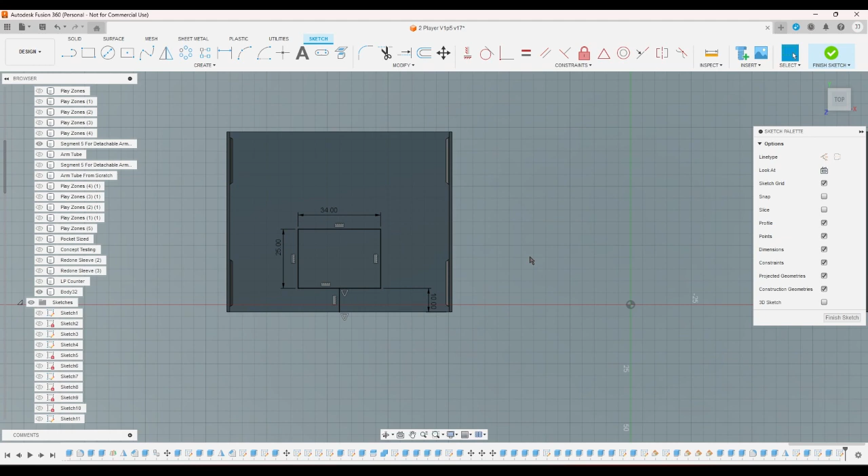So now bring up this one. Put a rectangle here. That is 33.2 by 25. Might as well make it 34. And then put it 10 above this. And then this middle to this middle has to be vertical. And then cut that out. Oh. Oh no. Wait. Wait. Wait. It only has to go that far. Which is still pretty bad. But not horrible.

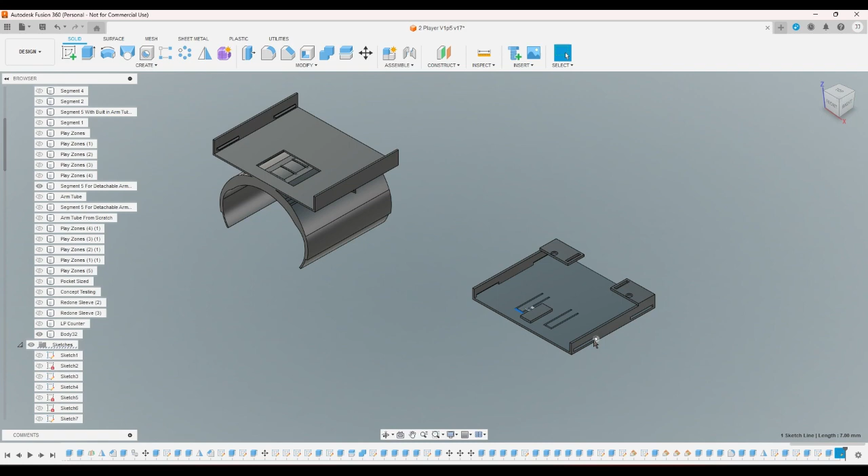Okay. Hang on. I don't think I need... Let me see. We'll go back to segment 5. Okay. From here to here is 26.8. And then it's 7. So if I go back into this sketch, from here to here, and I make it like 8-ish, just to be safe, because I did make it bigger. And then I change this extrusion to only include these bits. Okay.

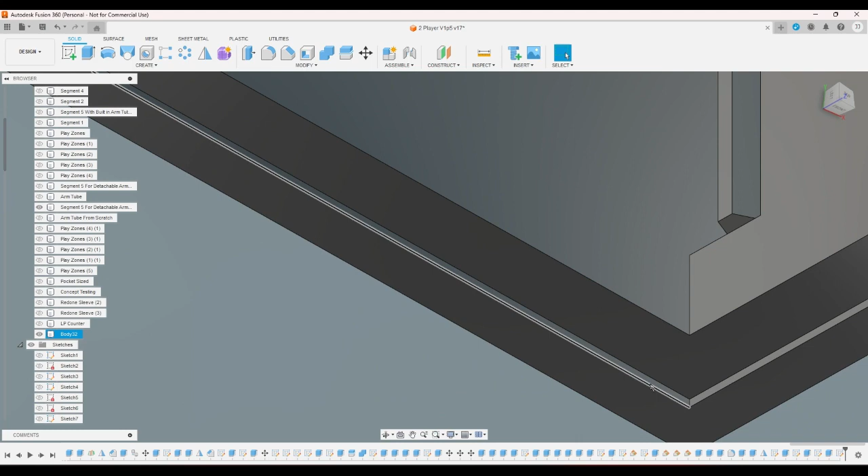So now if I have that, and I were to highlight this, that didn't work. No, I just need to get a quick peek at the sketch. Okay, good. That's good. And I think I can get away with 7 actually. Yeah, I can get away with 7. But I should do 33.2. Yeah, okay. That's a lot better. That's a lot better. Okay.

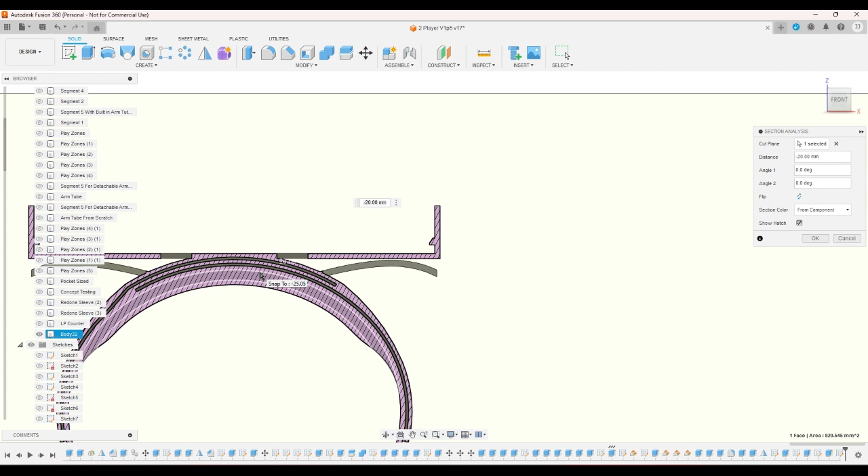So now I believe, let me just look at it real quick. If I just orbit this. There's a little bit of... Hang on. I think I need to do a section analysis. Okay. Yeah, cool. It's not interfering with this at all. Good. Okay, so now, oh my god, I have been at this for 2 hours. Ha, oops. I just kind of lost it there for a second.

I think, let's see. I think the best place to test this would be... I need to test... How do I test this? I need to test somewhere in the middle. But I need to test far enough that I get some piece of this. So what I think I'll do is I will split it. Where's the front to back mid plane? Front to back mid plane. Rename the body real quick to new sleeve is its new name because the redone sleeve is kind of dumb. Split this with this tool. Okay.

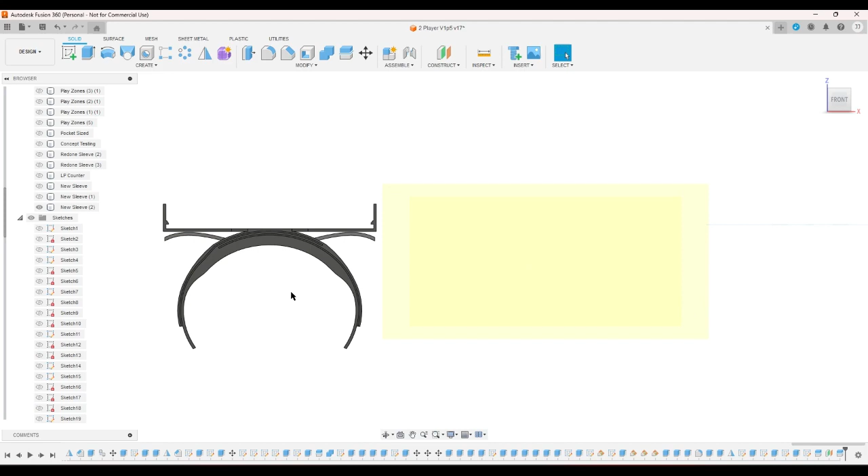And then put a plane about here. And then split it again. Alright, and then this, holy moly. This ought to have everything I need to test. It has a tiny bit, but it does have a little bit of the tabs to insert the thing. It has a bit of the hole for allowing the Duel Blade to open. It has about everything it needs. So then, yeah, it's got the life point tube, sleeve, track, whatever. I know what I forgot to add, but I'll add it later. So this has everything I need to test the function of everything.

So I will, and then I'm 90% sure that I can get a 55 degree overhang, but I'm not 100% sure. So I will be testing that overhang angle, but I'm pretty sure because I've done 55 before. So I will go ahead and take this, save it.

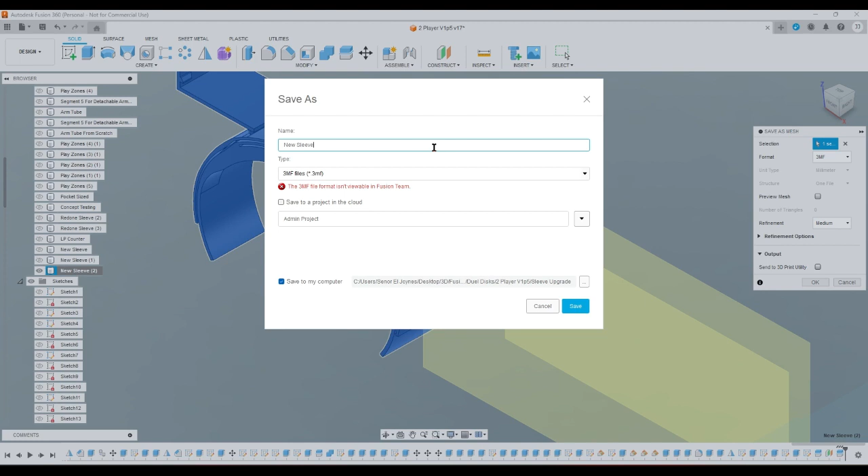New sleeve, test, save, and I will get it printed and I will test it out.

Okay, so I printed out what needed to be tested, and the strap fits in the strap slot perfectly, which was never going to be an issue, honestly. The life point counters, they fit, but they don't fit well enough to go up in there very far. You kind of have to do this and it'll get stuck when it starts having to bend a lot. So I'm going to increase that gap there from 0.6 to probably a whole millimeter, because it'll probably work with 0.8, but I want to be just absolutely sure, and I don't want to spend a lot of filament.

The tabs here for the insertion of the blade, it works. It goes in. Just gotta make sure it's actually in. Yeah, it's in. And then if I hold it up here, right, I can pull out the blade. So nothing is interfering with anything there. And I can pull it off if I want. I'm fairly certain that this will be a more secure connection than on the other one, because when it's in, it won't want to bend quite so much, but it does want to bend a lot.

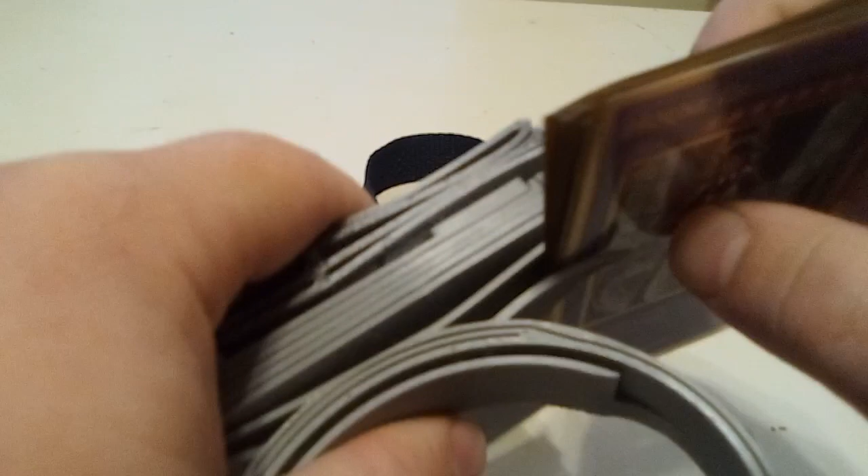And let me check something when I have the whole hand in real quick. What's bending where? Ah, look. Okay. So the part that's doing most of the bending is not this, but actually this. I don't like that. So I am going to change it. I'm going to make this just as thin as this. I'm going to make it 1.2 millimeters.

As far as fitting on my arm, it fits just fine, right? This is where it would be on my arm. And if I have the strap on it, I'm just going to slip the strap in through the side, even though that's not how you would actually do it, because it would be closed on the other side. But it's just easier for now. Right? And so that's about where it would be. So yeah, well, actually where the strap would be about here, and it would be pretty good.